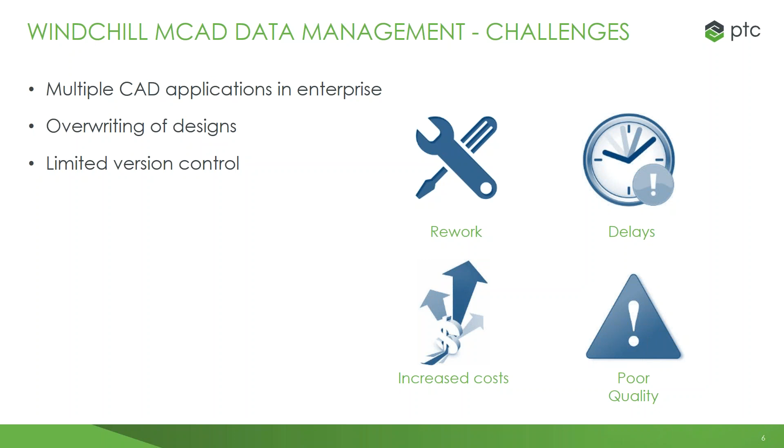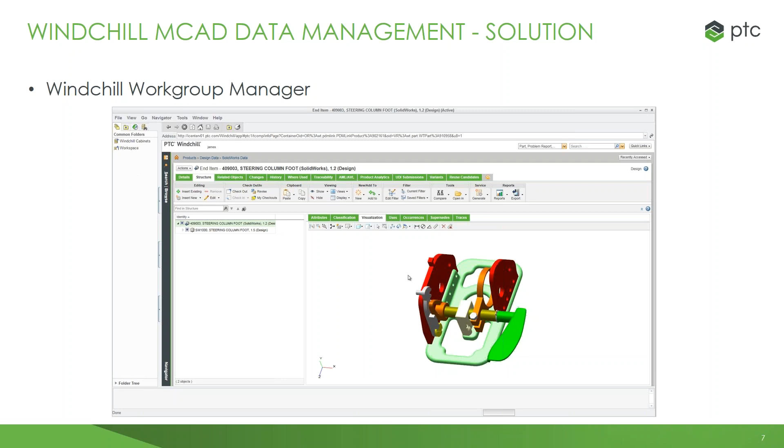But the solution to all of those is your Windchill Workgroup Manager. It allows you to manage all of your SolidWorks data, whether it's family tables or regular assemblies and part files, right within Windchill. It also makes that data apparent to other users who might be downstream of those engineers.

Looking at the capabilities here, it provides embedded data management tools—there's a ribbon embedded right within the SolidWorks user interface. That provides all of the essential data management actions you might need to perform right within the tool, giving familiarity so users working within SolidWorks day in and day out don't face a steep learning curve to manage their information within Windchill.

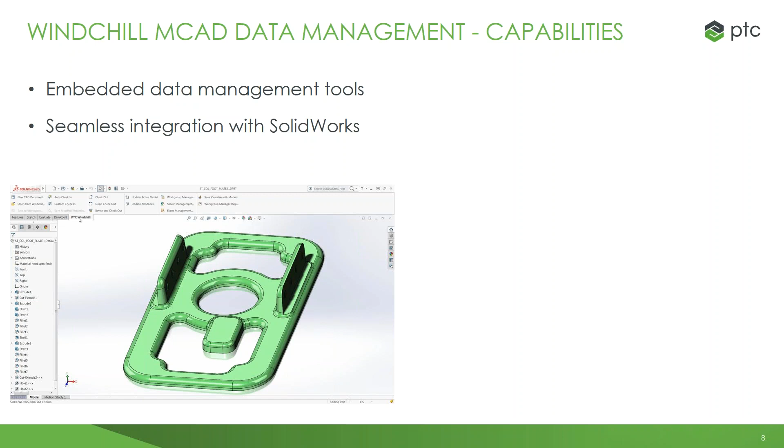The seamless integration with SolidWorks means we have the capability to manage whatever you're doing within SolidWorks within Windchill, and it's very seamless. There's a client, the Workgroup Manager, that runs alongside the SolidWorks CAD application, allowing you to use them side by side to manage your data very quickly, and you're made aware of everything that's going on.

Lastly for the capabilities is the enterprise level visualization. This is a big one because you want to be able to share your designs or how everything's going within the product development process with not just the engineers. They are important obviously, but there are also many other organizations that need to access this type of information within a data management system such as Windchill.

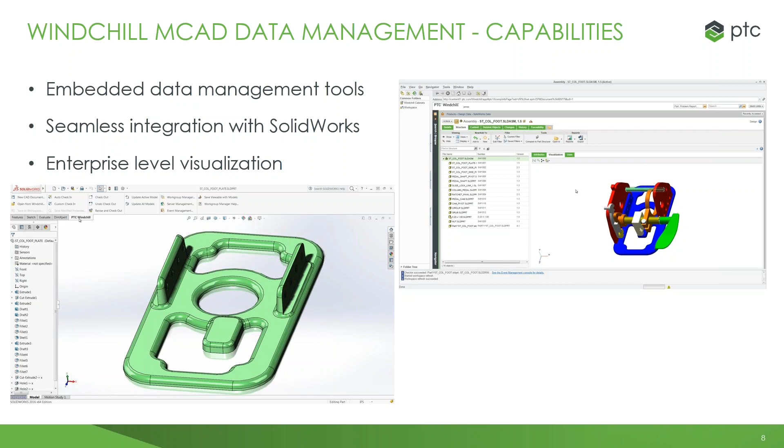So lastly, let's take a look at the value before we hop into the demonstration. With Windchill's Workgroup Manager for SolidWorks, it allows you to standardize on one PLM platform, even if you're not using Creo Parametric today. The ability to have multiple CAD systems or multiple CAD files managed within Windchill is a great asset and allows you to work with mergers and acquisitions very seamlessly, even though you might be on different tools.

It reduces scrap and rework, so you have that traceability, you have the revision control in terms of the status, letting everybody know that you're working on this item, do not make any modifications to it, as well as when you are going in to save something off, you're not overwriting anything—it's becoming the next piece of information that's being housed within Windchill.

Then lastly, because of the reduced scrap and rework, you're not going back and having to spend the time and resources on that. You can really accelerate the time to market for all of your products so that you can differentiate yourselves from the market and sell more product.

Okay, so that's really it here for the slides, PowerPoint slides for the SolidWorks Workgroup Manager. So now what I'd like to do is dive right into the demonstration of the software.

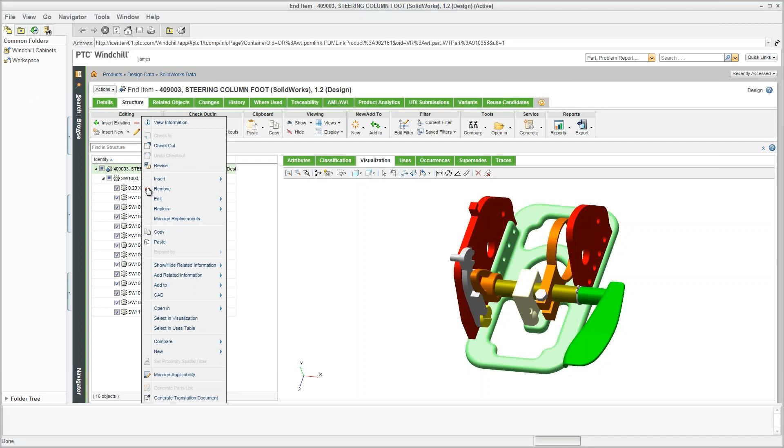So what we can do is quickly drill down into this information, and we can look at the footplate itself. If we went from the top level to one of the child components, right from the structure tab there, so we have our footplate. We can take a look at the attributes here, so a lot of the attribute information, and then we can quickly get into the viewing of this information within Creo View there.

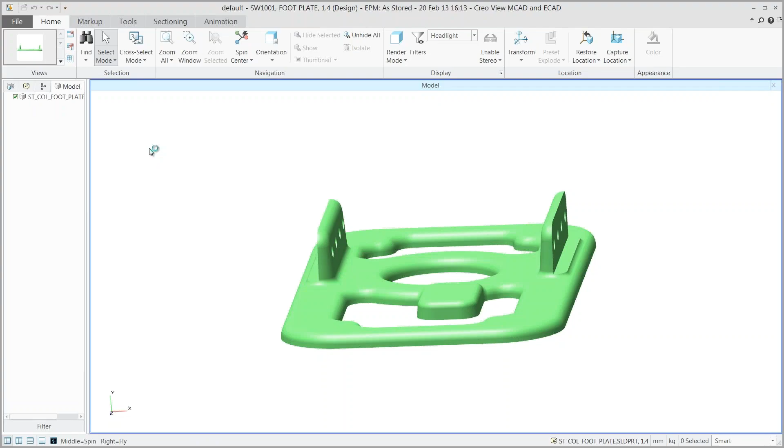Okay, so what we're looking at is the footplate right within Creo View. Now this is our lightweight viewing and representation tool. So upon check-in, a viewable will be created via Windchill and the Workgroup Manager. That viewable, no matter whether it's coming from Creo Parametric or SolidWorks or whatever it might be, it will create this viewable upon check-in. It's lightweight, less than 5% of the actual size of the CAD model, but it is all accurate geometry to the representative CAD model.

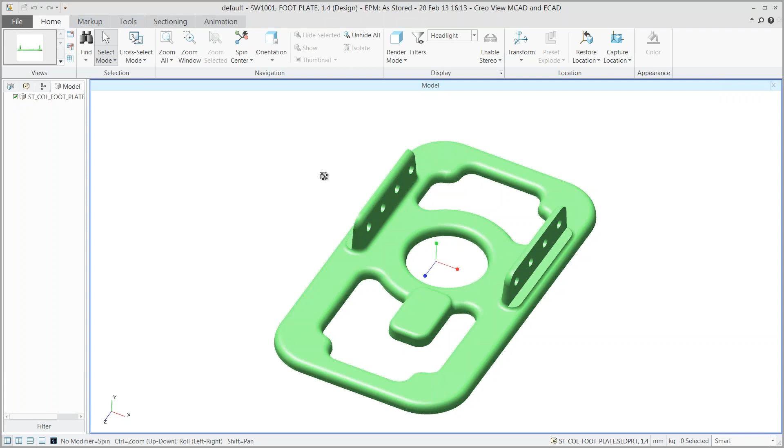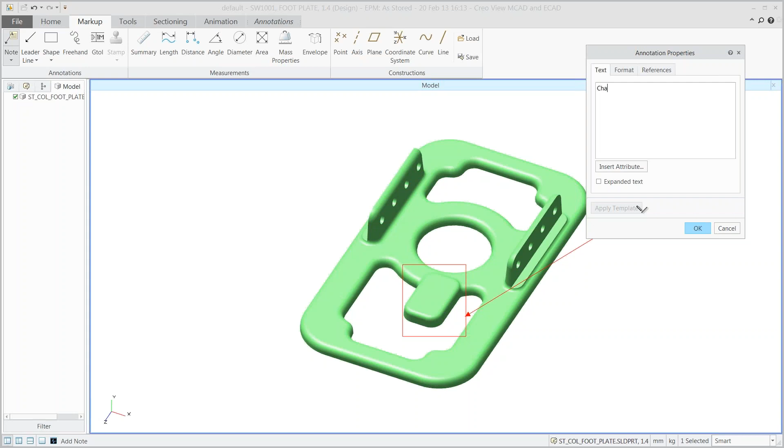So what we want to do here is take a look and perform some marking up. Some redlining can be done right from this interface. So we want to point out this section, this little pad here, and make note that we want to change that. That's something that is not quite right that I've taken a look at. We need to change the pad size within the authoring tool.

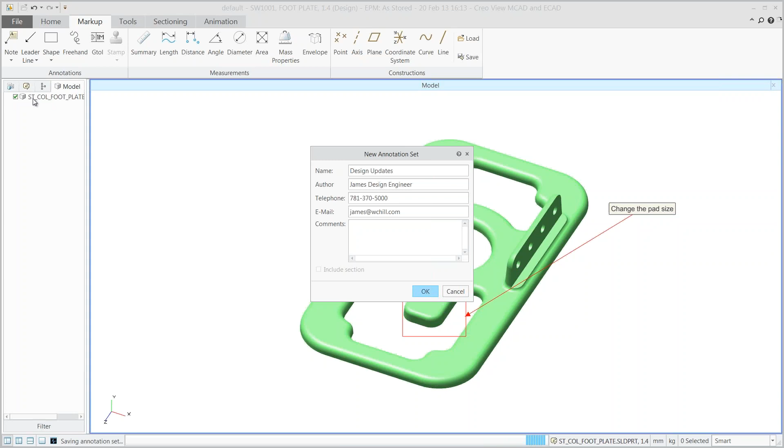So as you select on OK, we have that information now residing, and we can save this right into Windchill directly from Creo View here. So the design updates, we can go ahead and save that off. And now that has saved within Windchill for any user that has access to this specific footplate to be able to see that information.

But before we go in and change anything, let's take a look at the where used. So we have the ability to open up and view a where used report. So we know that the footplate is a part of the steering column foot, and we can see that right from this report here. So it's just for change impact or impact analysis, understanding what products you might be affecting if you were to modify this specific component.

So now if we switch over here to our SolidWorks client, we are no longer looking at the Workgroup Manager, we're looking at the SolidWorks CAD authoring tool.

So what you'll notice is if we go to the open feature, you'll notice that we have two options here, known as the common space and the workspace. This open is allowing you to choose directly from Windchill. And these two spaces, the common space and workspace, are residing on the Windchill server.

The common space is where you're going to store everything for all of your end users to see if they have access to it. And the workspace is going to be specifically for the end user.

So the way that I'd like to make an analogy here is that the workspace is more so going to be your cube or your desk that has all of your information or all of your gadgets, whatever you might need to do on a day-to-day basis right in front of you. So you pull that together, it's easily accessible within an arm's reach, whereas the common space is going to be more of a local filing cabinet where anybody has access to it. They can reach in, grab the stuff that they need, pull it down to their workspace or take it over to their cube and then work with it from there.

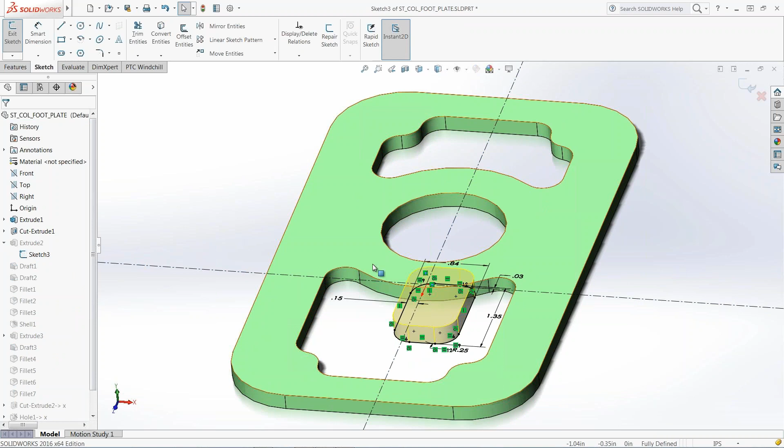What you'll see is that we have the existing parameters. We can go in and change those parameters to change the size, or the parameters that are driving that. So what we see here is that the changes have been made. We can go back and understand that we maybe want to change the appearances now as well.

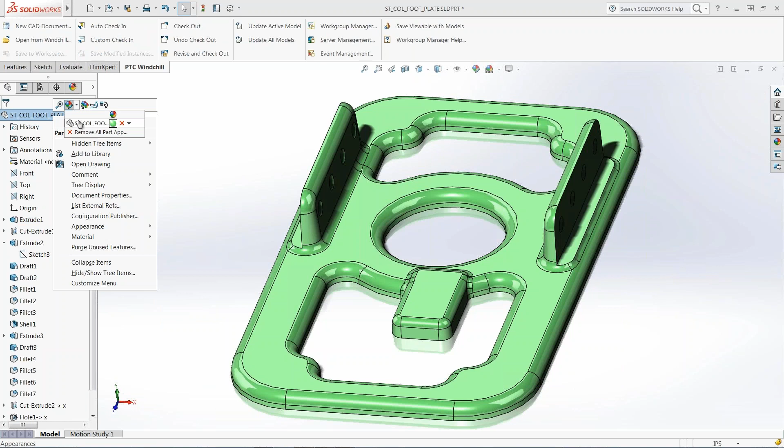So just to make a much more obvious change, we can say, okay, we've changed the pad there, but we've also changed the color. This is more so to demonstrate that the information is being added directly to the Windchill server upon check-in, immediately.

So next, let's go into our properties, and we'll say that we want to change the value for the description. The beauty of this is, if we're changing the description within the summary of information for the parameters or the attribute information within SolidWorks, this is able to be mapped directly to Windchill.

So you enter it in within SolidWorks, and then that information is pulled up into Windchill, and that allows any user searching for this information to search for something within one of those mapped attributes, such as steering column assembly or footplate, whatever it might be within that text expression, allowing them to pull this information up very quickly.

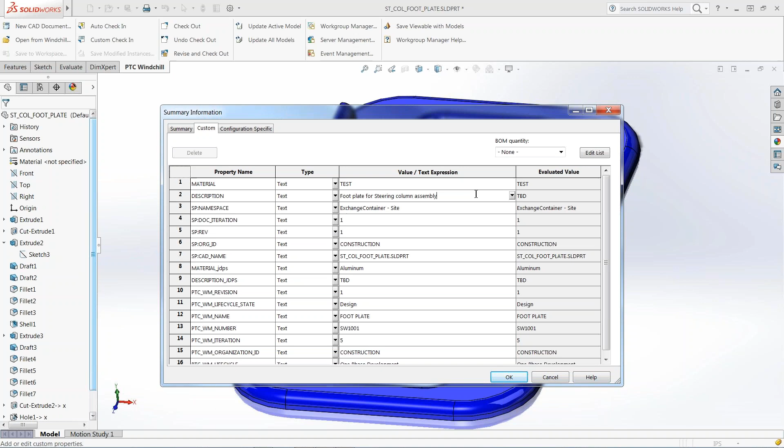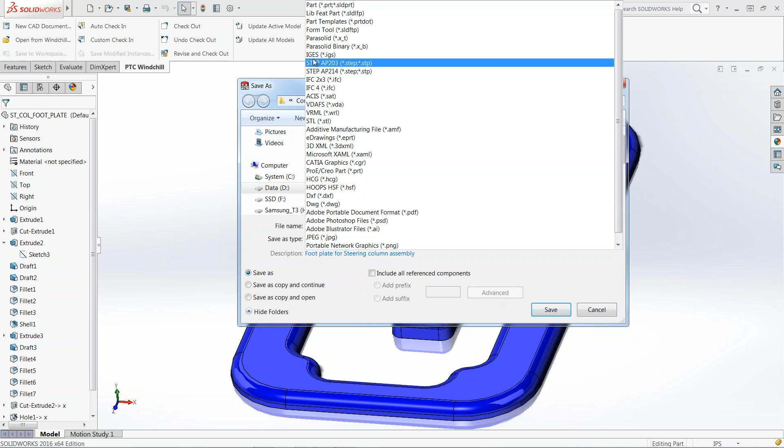Okay, so now that we've added that in, we want to perform a save as. The reason we're doing this is because today's environment is very heterogeneous in terms of working with suppliers or whatever it might be, and we want that to really be able to be managed within Windchill.

So what we're doing is saving a copy of the footplate as an IGES file, and we're going to also manage that within Windchill. We're going to basically attach that to the footplate.

All right, so now we're back within the Workgroup Manager. What we're going to do is go in to our workspace and understand that there is the footplate that we have made modifications to.

All right, so what we see is it's checked out. The footplate is currently checked out with that yellow post-it with the blue arrow, and we have the CAD part here. So while it's still checked out, we're going to edit the attachments and add in that IGES file. That IGES file is actually not going to be version or iteration controlled because it is more secondary content, and so it will reside with this specific iteration of the footplate.

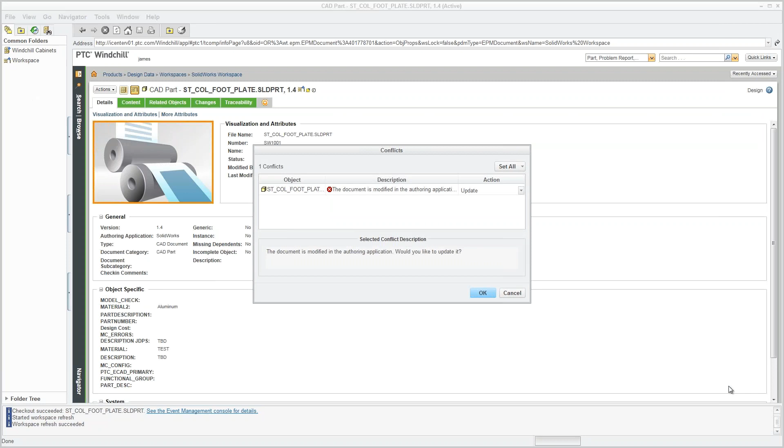So if you know that you're going to make more modifications to the footplate, you can go in and create another IGES based off of that new iteration or modification of the design. All right, so moving back into SolidWorks, what we're going to do is perform a custom check-in.

And we have our footplate. So let's go ahead and finish that up.

Check-in started. You see all that within the event management console. You're made aware of anything that's going on currently within Windchill. And what you could see is we have the check-in has now succeeded. Let's go ahead and go back to our home screen where we can see all of our updates.

So now that our footplate has been checked in, we see that we have a 1.5 version instead of 1.4. And we see that the footplate is now blue in the visualization there. If we go to our content, we see our IGES file has been uploaded as an export, so you can quickly download that directly from Windchill if you saw fit.

Also within the screen, you'll see under the description there, under the object-specific attributes, the description says footplate for steering column assembly, and that has automatically been mapped into Windchill based off of the check-in of the footplate.

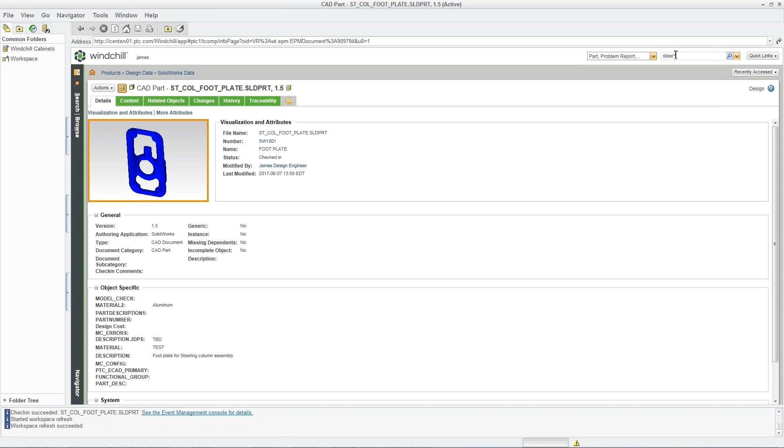All right, so now if we go to use our search function within Windchill, we're going to search for steer, and it's going to pull up some more information. We see that we have 374 objects. We want to focus here on this drawing, so that's what we want.

We'll go ahead and select on that and go into the details for the drawing here. So what you'll see is we have the ability to open this within SolidWorks right from the Workgroup Manager as well. So there's two ways to go about opening this up. It's really based off of the user's preference, but we wanted to highlight that there are multiple ways to open this up within or download this directly to SolidWorks so you can make modifications to it.

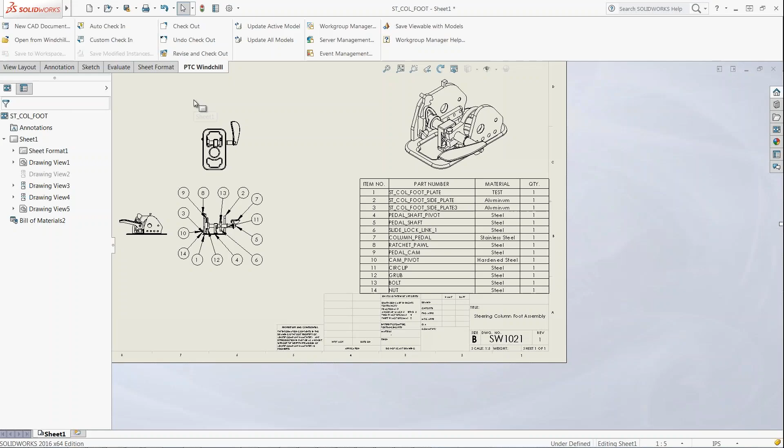So we have our event management letting us know that we have now added this to SolidWorks, and we see that it has opened up. What we could do here is right within this drawing, we now have our drawing for the assembly.

We want to insert a column to the right, and what this allows you to do is, since this is hooked up to our Workgroup Manager, it's connected, we can now bring our Windchill attribute information coming directly from this assembly and add it right into the drawing column here. So just like that, we now have all of the life cycle states of each of those components that makes up this assembly.

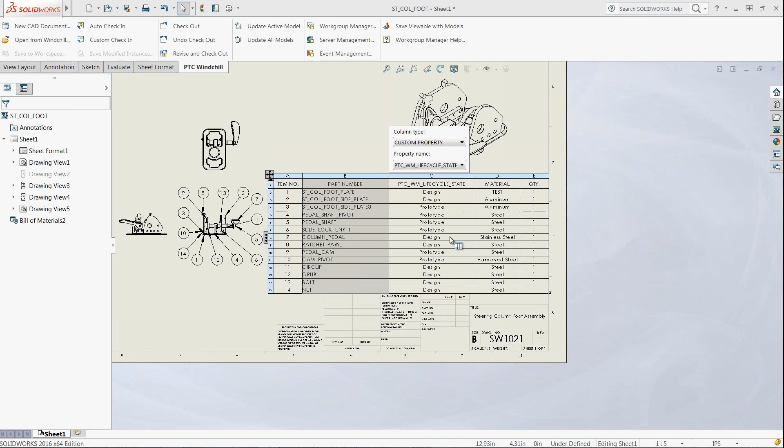Okay, but now what we want to do is we want to go in and see, okay, we're going to open this up right from our workspace. We see that we have that as our directory. So right from our workspace, let's go in and open up the full assembly as a separate file here.

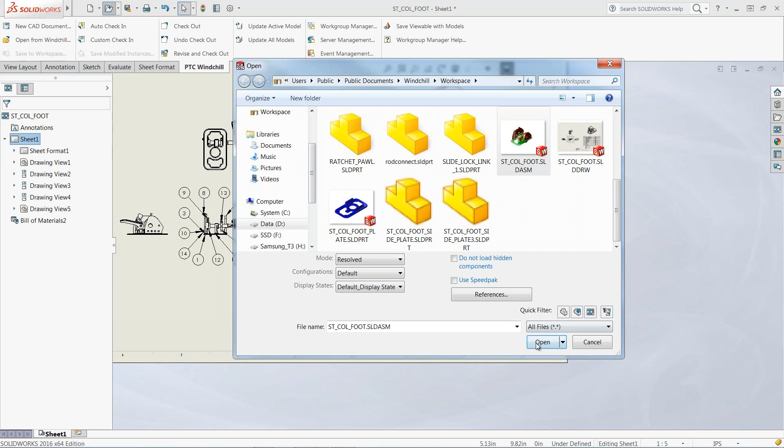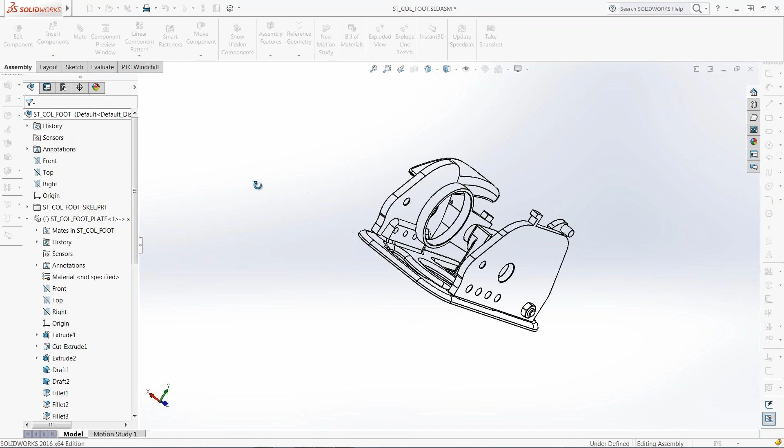Okay, so now we have our full assembly opened up, and what we'd like to do is we would like to go in and make the modifications to the assembly and really add in a new component. So this is going to demonstrate the idea of references within Windchill, and that we can manage those references as well directly within the Windchill server, Windchill system.

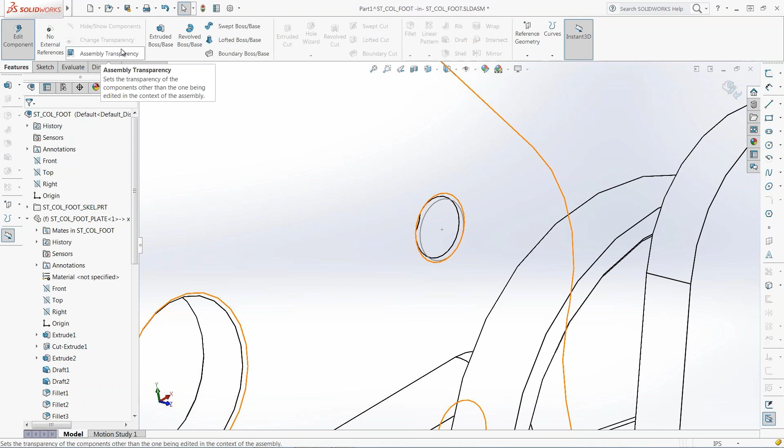What we're going to do is we're going to extrude basically a rod from one side of the assembly to the next, and have those both be references that are going to be associated to this newly designed rod or extrude.

Okay, so now that we're going through with our extrude, we see that we have created the rod that is in association to those two parts, those two side plates.

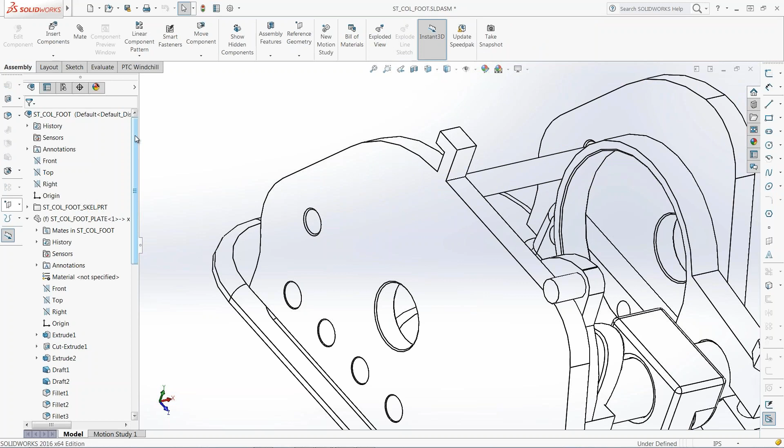And now what we're going to do is we're going to look in our assembly tree, our model tree, and see that we have our new part here located. So what we're going to do is we're going to open that part up in a separate instance of SolidWorks.

And what we wanted to do is we want to go in and change some of those parameters so that it can be mapped right within Windchill.

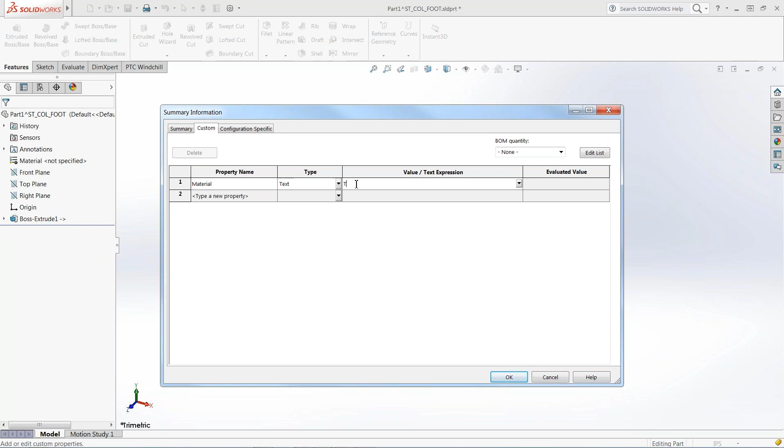So we'll call that the material, and we'll put in the value to be determined as of right now. That can be changed later on down the road. And what we could do is we're going to save this to our workspace. So this is a new component that is now going to be saved to our workspace.

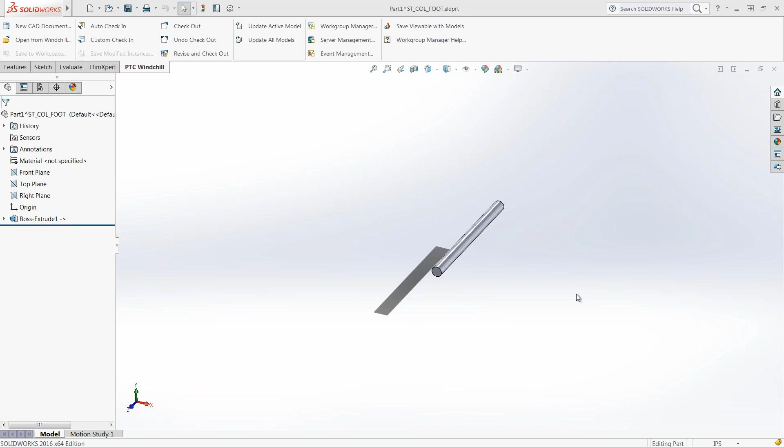And we see the event management console on the bottom left-hand corner there, showing all of us that information.

Okay, so now if we go back to our drawing, we're going to perform a custom check-in. And what that allows you to do is upon check-in, it'll allow you to create those WT parts as we mentioned. So you'll notice that we have the new part, it's new locally, that is a dependent, the collection rule there is a dependent of the assembly. And we have our drawing, it is the initially selected, and then we have our assembly there as well.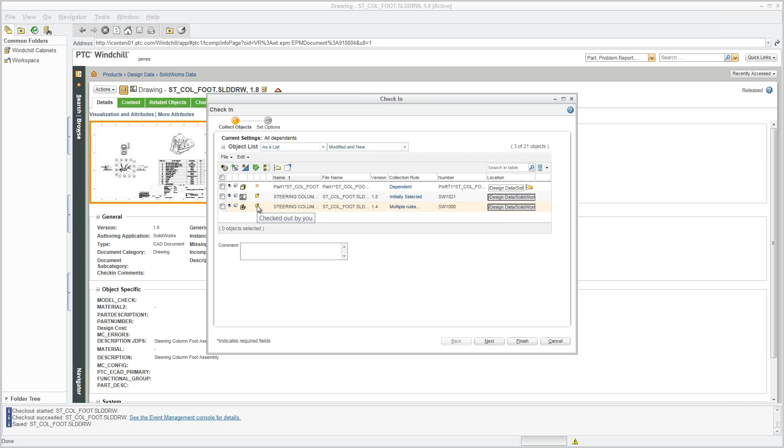If we select next with the custom check-in, we can auto-associate these parts to CAD documents. That newly designed part in association to the assembly doesn't currently have a WT part associated to it. But if we select auto-associate parts to CAD documents, Windchill will create a new part for that specific CAD document and associate them together, so you have traceability and the ability to quickly link back and forth.

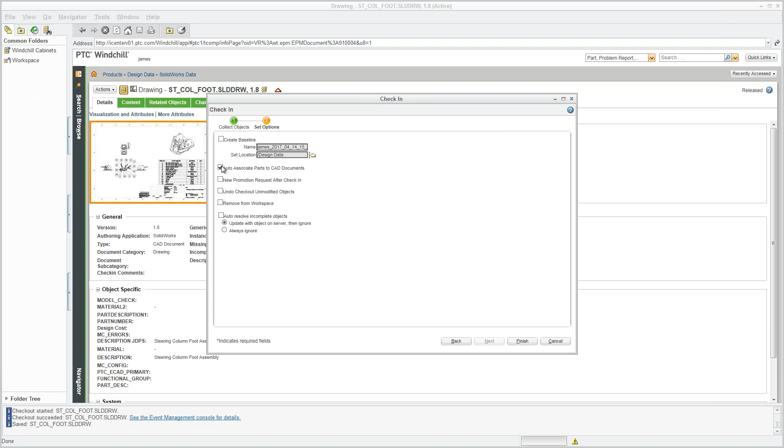So now we can finish up that process of the check-in, the custom check-in there. We see the check-in has now succeeded, and once again we can go back to the home screen, where we can see all of the updates for the table and the steering column that we've just worked with.

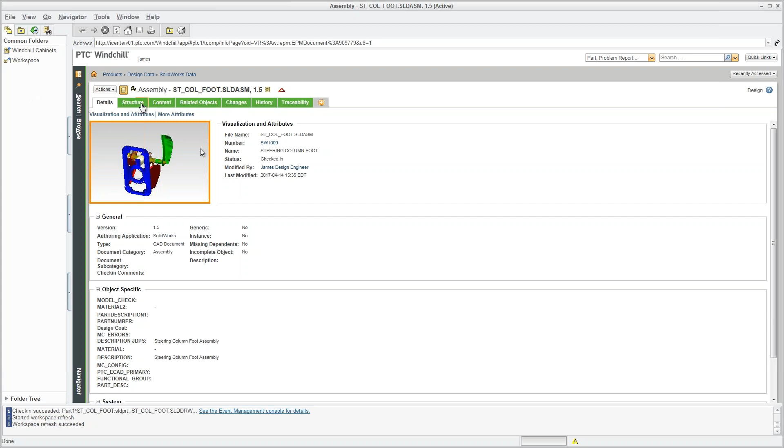Taking a look at the assembly, you'll notice that upon check-in, the viewable has changed. We see the blue foot plate, but we also see the interconnecting rod that we just added in. That all updates upon check-in very quickly, so all the downstream users can see that information and consume it to understand where the product development process lies.

Again, with the visualization in the structure tab, we see that rod has now been added, and we have the foot plate or the new part there as well. If we dig into that part itself, we see that the material 2 is listed as to be determined, which is what we've already added in there.

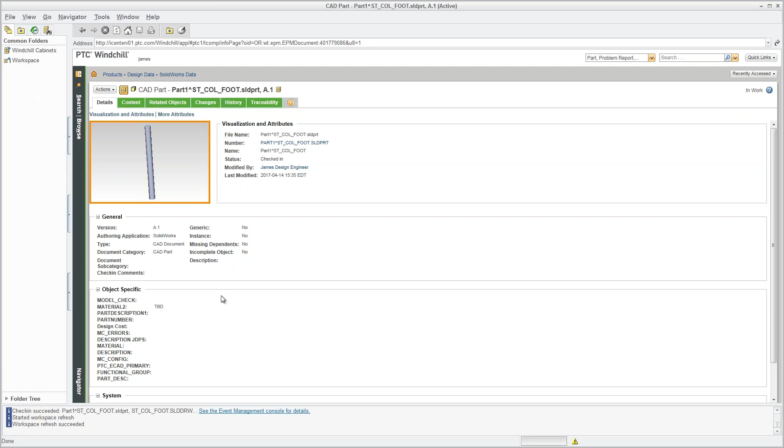So what we could do is take a look at the visualization there as well and go to related objects to see those references that were created. We have the where-used report as well as the references down below for the side plate and the steering column foot as those design references.

Navigating back to the assembly, we want to go in and perform a new promotion request. Now that this has been completed, we've added all of the components that we need for this steering column foot. We want to go in with a promotion request, and what a promotion request within Windchill allows you to do is change, since Windchill is a PLM system, not just a PDM system, the state in which the steering column foot is displayed.

This can be tied to specific roles, and Windchill is access-based in that right, so if this changes states, it will change the end users that can view or work with this information. So we went into the collector and collected all of the dependents of this assembly very quickly. That's what the collector is there for - it allows you to collect information without having to sift through the Windchill system. It's all presented to you up front.

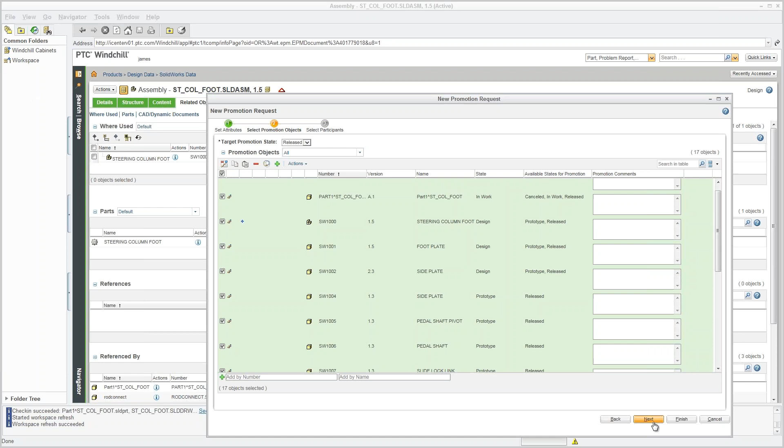So selecting on everything there, we want to change that promotion state to released from the in-work side of things. We'll go ahead and select who we want to participate in this promotion request - we have James, the design engineer, as well as Pat, the product manager, as the reviewer and approver. So we'll finish that up.

Now that we have confirmation of that created workflow, we can go back to the home page, and within Windchill we have the out-of-the-box workflows. So the promotion request is going to come directly back to James. The reason we do that is for demonstration purposes, so we can showcase what a promotion request task looks like.

So you've been tasked to approve this promotion request. We have the promotion objects right there in easy reach, along with the special instructions and the process status lined up for us here. If we've taken a look at everything, we can go in and say we want to approve it, reject it, or rework it. We'll say that this has been approved.

We'll go in and complete that task so that it will move to the different state - from in-work to the released state. If we take a look at the steering column foot, we see that it is now in the released state instead of in work. That could potentially entail that the engineers are no longer having access to it; it's more so down with the manufacturing side of things.

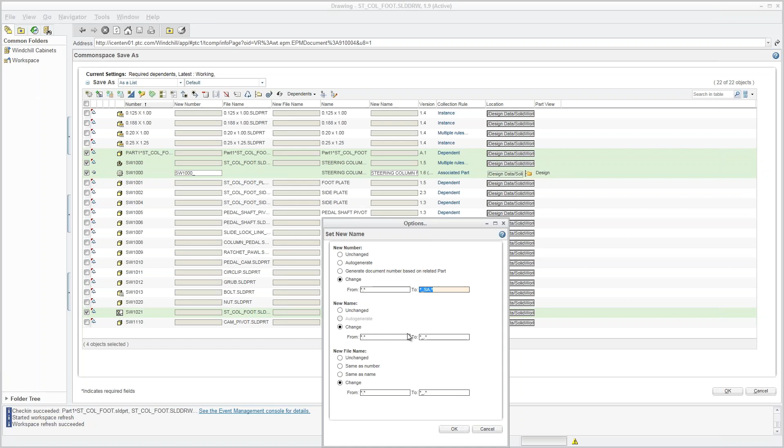Okay, so now that we've changed the file name to add an _SA at the end for a save as, we'll go ahead and select OK. Windchill will go in and create those new parts based off of what was already within the system.

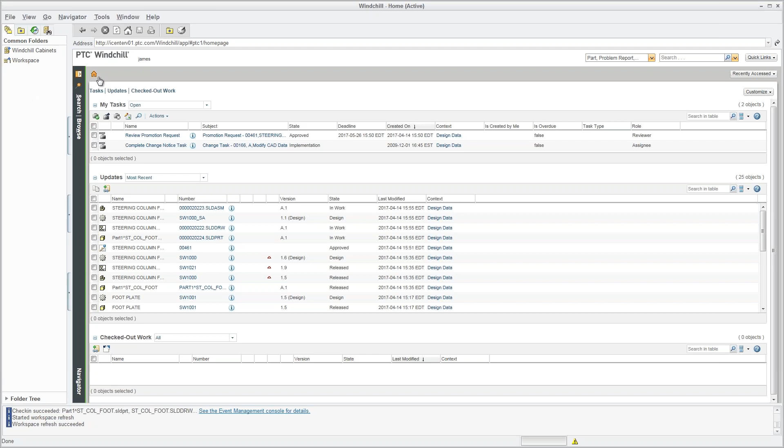So if we go back to the home screen, to the updates table, you'll see we have all of our save as's here, with A.1 versions for each of these. And if we take a look at the drawing itself, you see the _SA A.1 version right here within the Windchill Workgroup Manager. You also see the where used within the steering column drawing, the parts, as well as the references still preserved for this _SA part name.

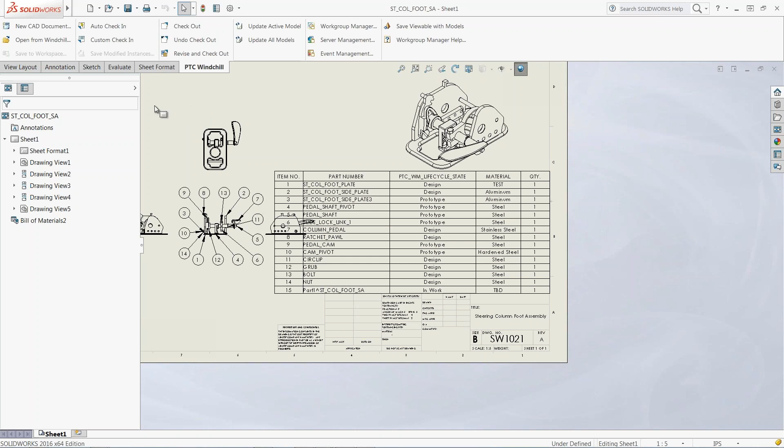Okay, so now let's go in and perform the search function once more. This is pretty much the last aspect of the demonstration, the idea behind family tables. We want to showcase that there's the capability to manage family tables directly within Windchill, so you can create a new custom tab and add in family table right to that tab.

So we see that we have this bolt as the generic, and then we have multiple instances of that generic. What we want to show is how quick and easy it is to go into the Workgroup Manager, pull up the generic, understand that there is a generic, bring that down into SolidWorks, create a new instance, and then save that back off into Windchill. So we'll show what that looks like here and how that would work.

So what we're doing now is we're going to check these out, all of these instances, into our workspace so that we can work with them effectively and efficiently. And we're going to open that up directly within the authoring application. You have that capability here within the Workgroup Manager.

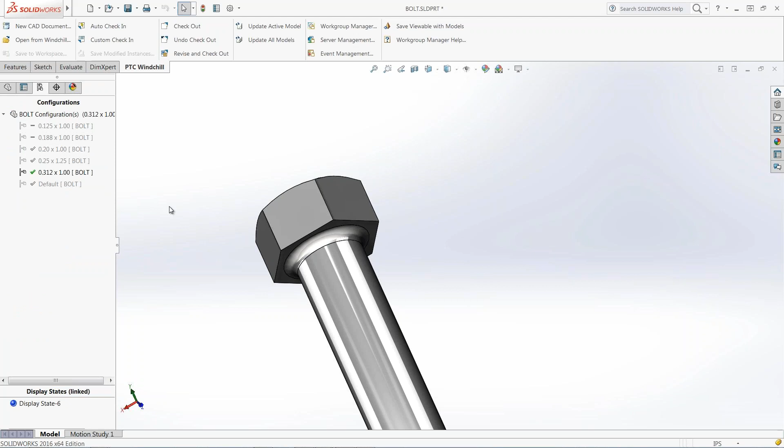Okay, so let's add a configuration here, and the name is just going to be very simple - the type of configuration that we're going to be implementing. Now that has been selected, what we could do is go in and make modifications to the bolt itself to match those specific configurations we're looking at.

So we'll change the diameter to 0.312, and we'll change the length to 1.0. So now that we've accomplished that, it's exactly what we wanted to do.

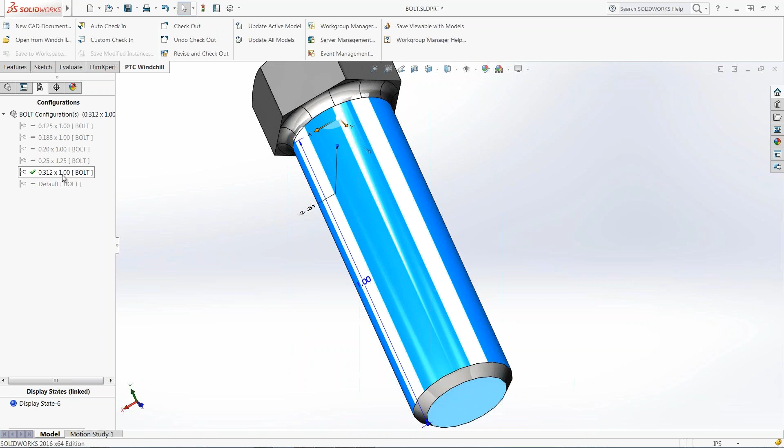So we see that we have all of the instances of the bolts, and we have the new configuration, the one there that we've just added in. We'll go ahead and finish that up, and now those will check in.

So the check-in process is now completed. See that those icons have gone away. And we have our top configuration of the bolt, and we have our 0.312 now added in here with a new version. So Windchill is capable of managing all of those configurations that you might need, so whatever data management needs you have, Windchill is going to be your source to manage that effectively and efficiently.

So that wraps up what I had here in mind for the demonstration today on the SolidWorks Workgroup Manager. I'm going to go ahead and pass it back off to Dustin to wrap things up, and then we'll go from there. Thank you for your cooperation, and I'll go ahead and pass it over.